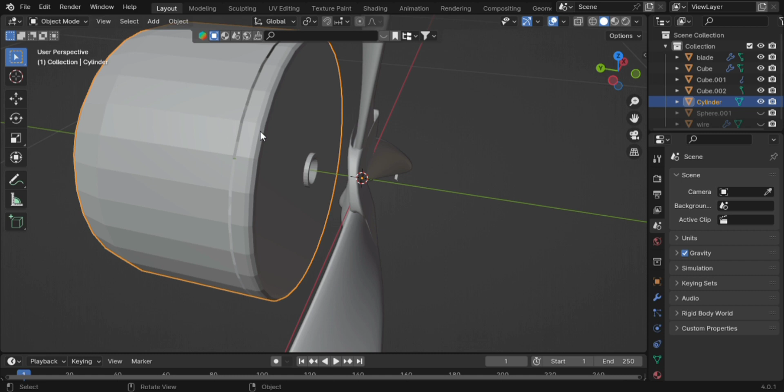Let's go ahead and shade smooth this back. If you haven't watched part one, check the channel. Let's tap into edit mode, and we're going to change a few things here. First, we're going to loop select the outer edges on the y-axis, front and back.

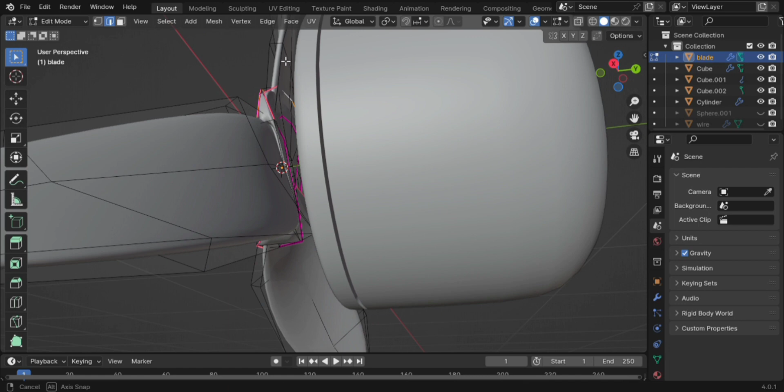Then we're going to scale in that circle so it makes sense. Just loop select this and this - I'm holding down Shift Alt, by the way, selecting this, and then go to the back and do the same thing. Loop select this, and loop select that, just going around.

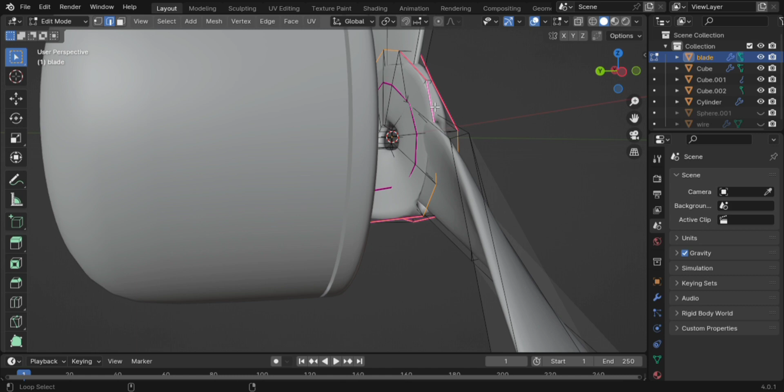Please bear with me, the mouse is acting up. Loop select this, and loop select this, and finally loop select this. So now we have everything selected. Go to your front view, and we want to scale it in like that.

You guys kind of get the point now. We're trying to get a very organic looking fan so it doesn't look like something that's just modeled out of a cylinder. So I think that's about what I'm going to go with.

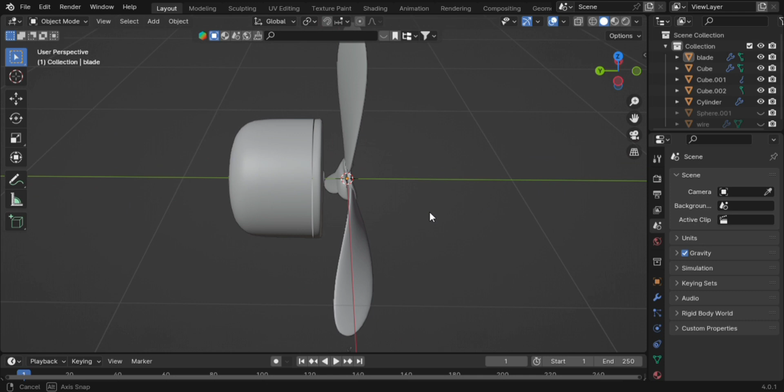Let's hide this - select this, press H, and I think there's one more. Yeah, that one - select it and press H. Hide it. Now this is what we have, right? Great, so we're going to continue modeling.

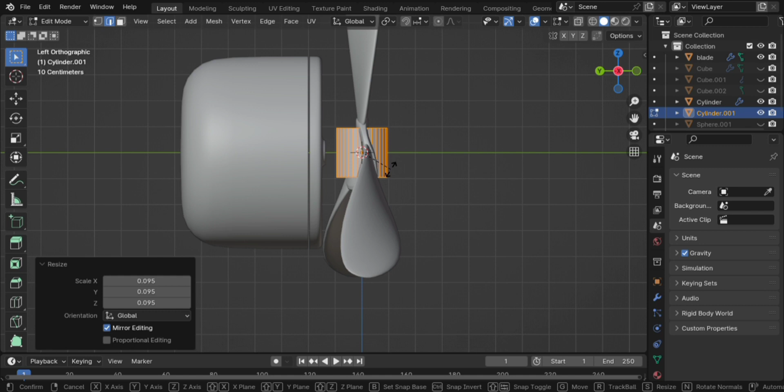We want to go Shift A mesh and get a cylinder, tap in and scale it down. We're going to use R X90 and press enter. We're going to use this to make the rod that connects the motor to the fan.

So we're going to scale it out like that, then GY, and kind of place it in there like that. Now we're going to do a few things here, right? We're going to...

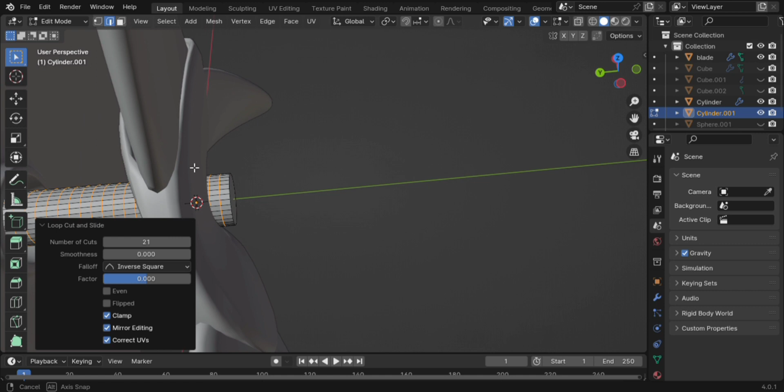We're going to add in some loop cuts, like about that many, and go to our face select option, Shift Alt select this face, E to extrude, right click to let go, Alt S, and then scale along the normals like that.

Now this face we're going to use to sort of cover that hole there. So we're going to select this edge and bevel it, Control B, just to give it a more defined shape, but we're going to do some extra tweaking.

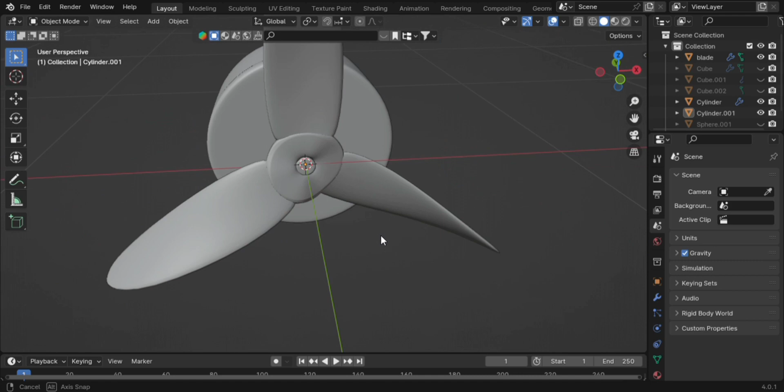Because from afar you can't really see, but I don't want to leave details unresolved. I think that's the word. I don't want to leave the details without resolving issues with it. Every single detail I have to try to...

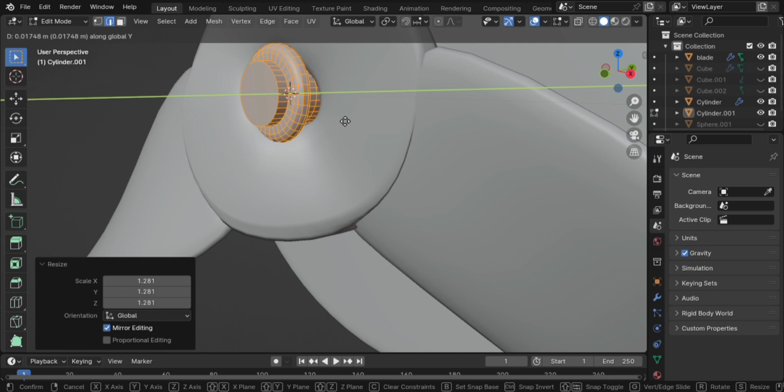Let's move it back, G Y. From the front, it's embedded in the fan blade body, but I'm sure there's a way we can go about this. We don't have a reference material for this project, that's why it's a bit difficult, but it shouldn't be that difficult.

I'll figure it out. So what we want to do is loop select this and then scale it out like that, just to make it big, right?

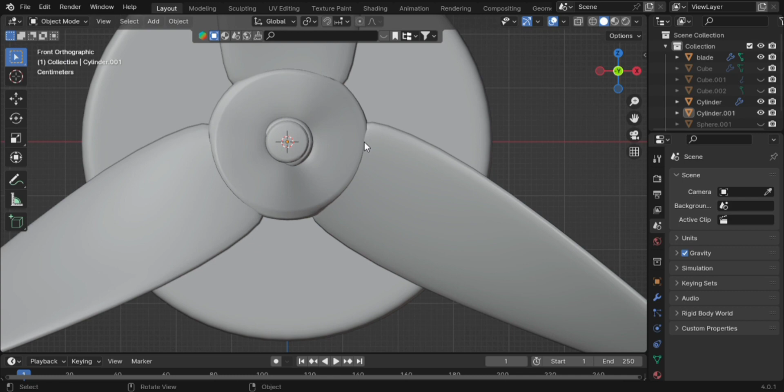I want to bevel this front, give it a more defined shape. Then look at it from the front. I think it looks a little bit better now, but we're still going to work on that. We might leave it like this, but I don't feel comfortable.

Let's just correct that. Select it, tab in, loop select this edge, these faces and this face, and E to extrude, right click to let go, and then Alt S and scale along the normals like that, just so it's a little bit thick, so it fits in there perfectly. So let's tab back out and see how it looks.

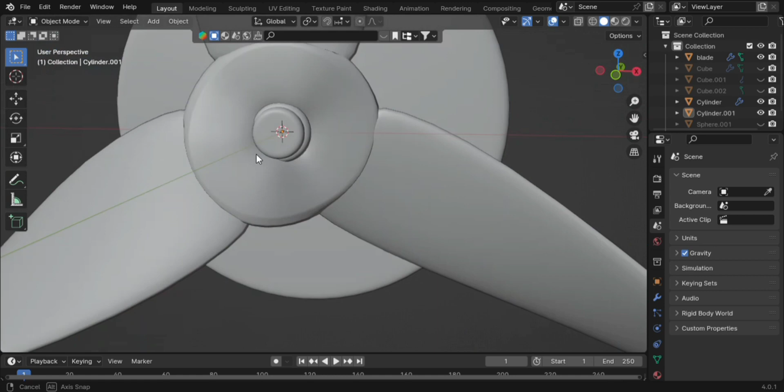We want to tab in, select this face, and I to inset, Shift R 3 times, and right click and go shade smooth, and this is what we have. I think we can work with this, since the fan blade will not be the focus of our scene.

We're going to set the origin of this to geometry because we're going to do a boolean operation on it. So let's add in a cylinder, we're going to use this, just scale it down. We're going to use the cylinder to make the little detail at the back.

You know that button at the back of the fan where you press so it can rotate or stop rotating, that small detail - so that's what we're trying to do with this. Let's scale it really small, and then just place it up there like that, right?

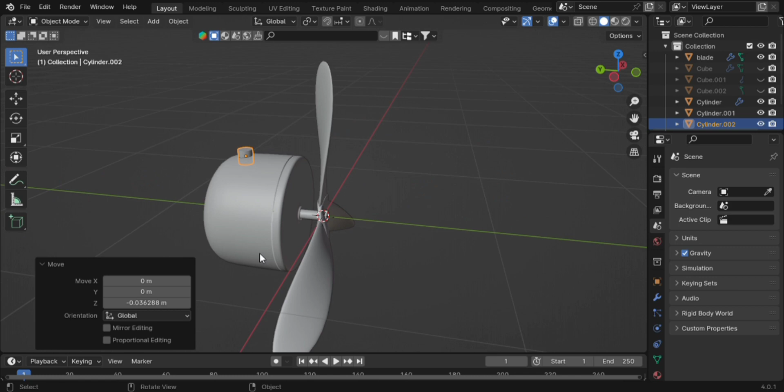So let us select this back, go to modifiers, go ahead and give it a boolean, and click on the eyedropper and select the new cylinder.

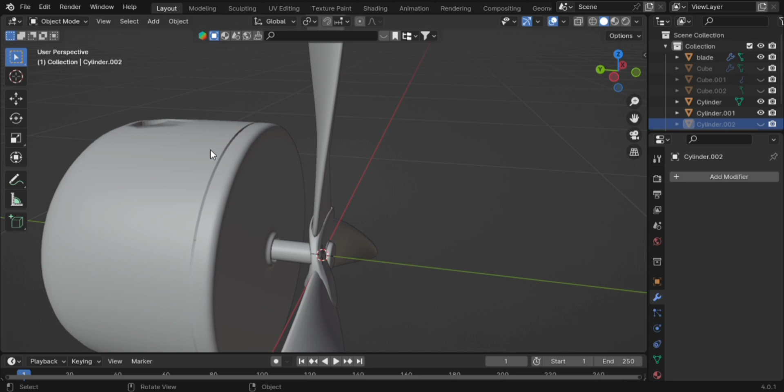You want to go ahead and apply all of these modifiers, add subdivision surface, and then this boolean, and then press this and press H to hide it. You see weird shading, right click and go shade auto smooth to fix that issue, and then Alt H, bring back everything, and we're going to continue modeling.

So let's scale this in like that, so we kind of have that cavity where that thing is seated, so it looks like it's coming out of that. You guys get the whole point. So you want to loop select this, go F3, checker deselect.

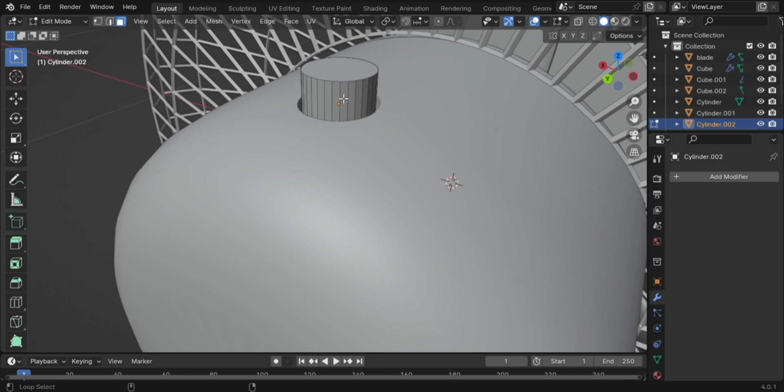It will go ahead and select every other one. You want to go to your top view, go Alt E, and extrude individual faces, just extrude them out like that to give it a more defined shape and make it look good.

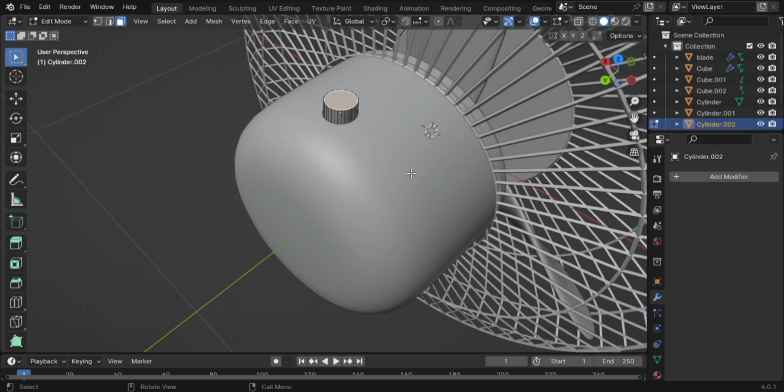You might want to select this top part and extrude it up a little bit. Then loop select this, right click to let go, and go Alt S and scale along the normals like that.

Let's see, I'm trying to think, is this how they did it? Okay yeah, this is exactly how it looks like, I think.

So we're gonna give this a subdivision surface modifier. Okay, we're gonna give this a subdiv modifier.

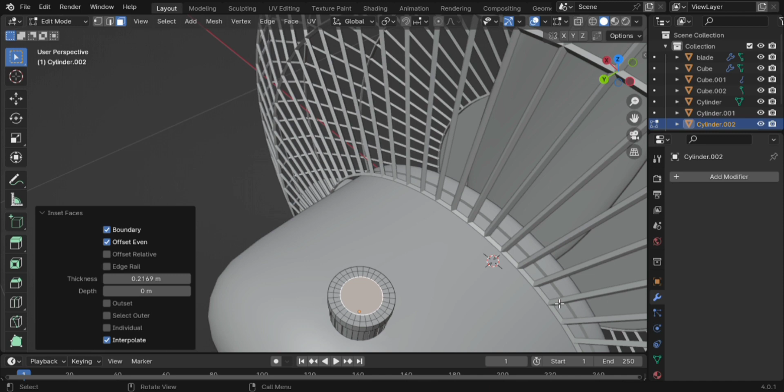I'm trying to look at this. Let's inset this face - I want to be sure I have decent topology so it doesn't mess up my work. Shift R to repeat that action, and that is great. So now if we give this a subdivision surface modifier, it's still not going to work.

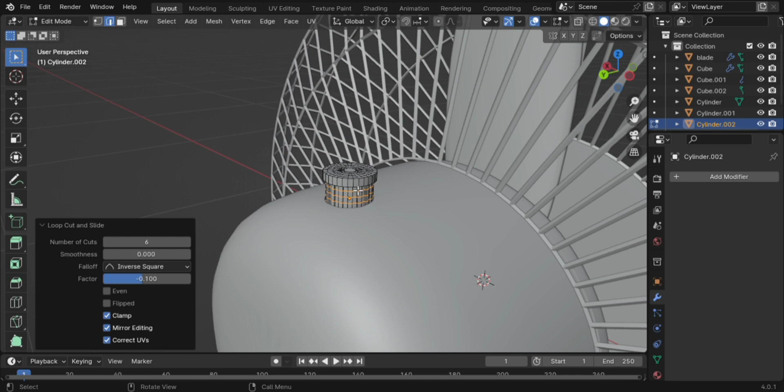We're going to have to add in some loop cuts here. Hovering over this place, Control R to add those loop cuts, and maybe add one or two up here as well.

So when we give it a subdivision surface modifier, it doesn't spoil the topology that we have. You want to tab out and go Control 1. That gives it one level of subdivision surface modifier. Go shade smooth, and this is what you have.

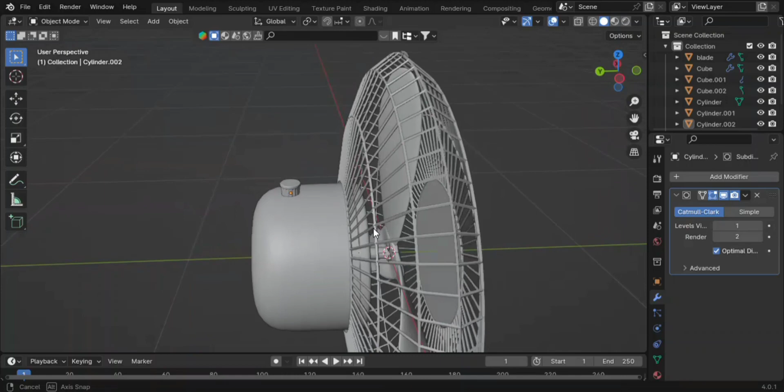So this is where we've gotten so far. We want to go ahead and model the other parts of the fan. As you can see, we're making progress. We are almost done with the modeling.

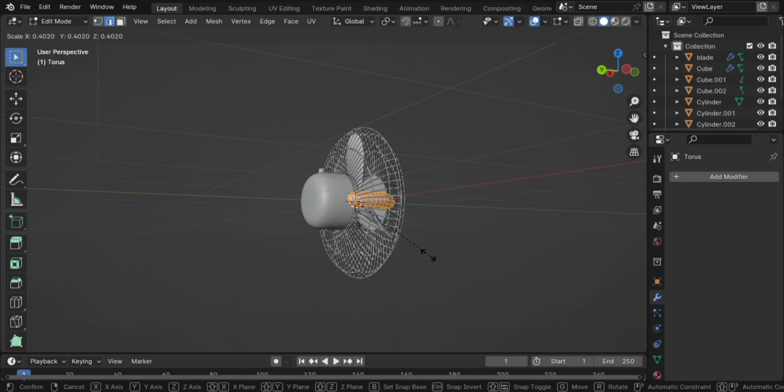Let's go Shift A, mesh and torus, tab in, and then scale this torus to be really, really small. Then bring it back, G, scale it really small, and move it down like that.

Now we want to place this torus where we're going to be extruding. Go Alt S to make it really thin like that, and place it where we're going to be extruding out the rod from the standing rod.

So with this torus active now, I'm trying to figure out if I need to do a boolean operation again so that the rod can come out of a cavity, but that's not really necessary.

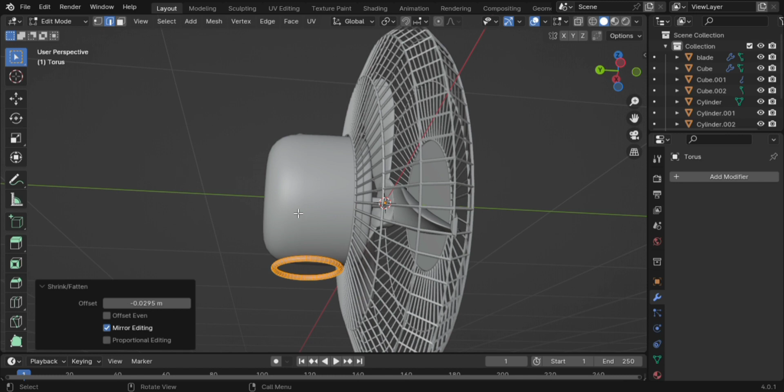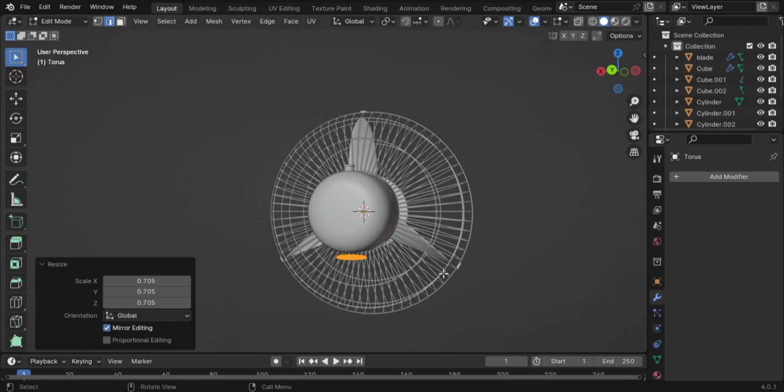So with the torus active, now we're gonna put this torus - I'm trying to see where we can put this. Look at this, okay, let's just get it down like that. I want to go like about that much, that's okay.

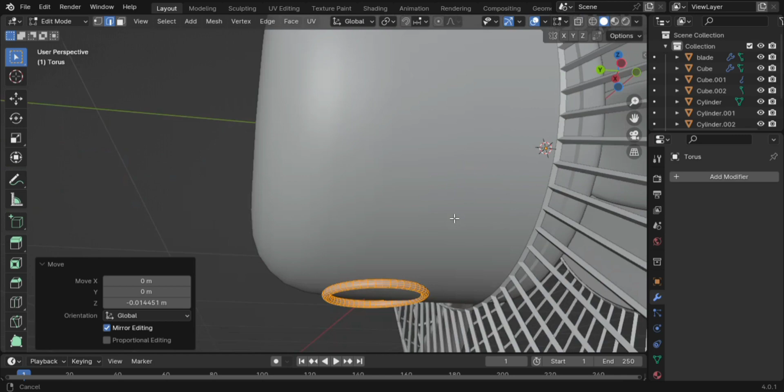G, Z, and move it up like that. We want to scale it down even and bring it down a little bit like that, and scale it down a little bit also.

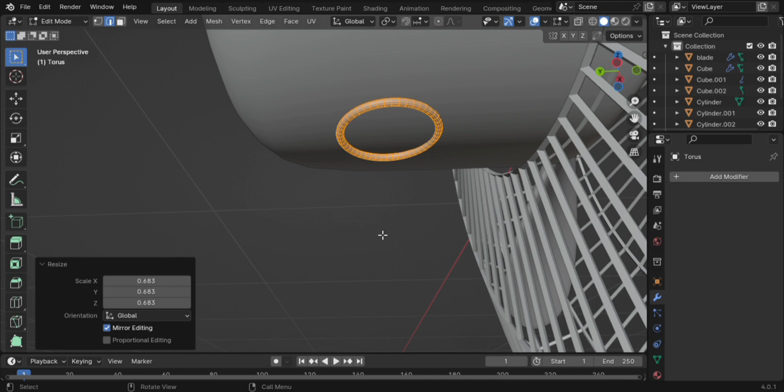Okay, so looking at it, that's fine. So from your top view, we're going to try to place it somewhere that makes sense. I want to tab back out and look at it from the side, look at it from every angle and make sure it is well placed.

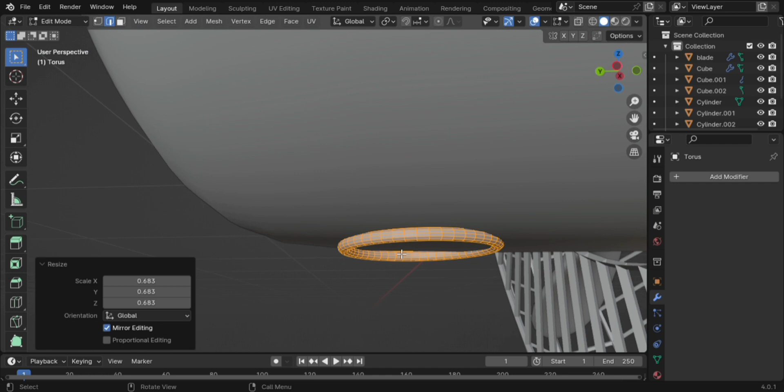That's going to save your work. It's going to help you get things right, make sure they are well placed.

Okay, we have our fan coming together quite nicely. So the next thing you want to do is tab back out and go shade smooth. Look at it - detail is everything, you need to be sure you're getting it right.

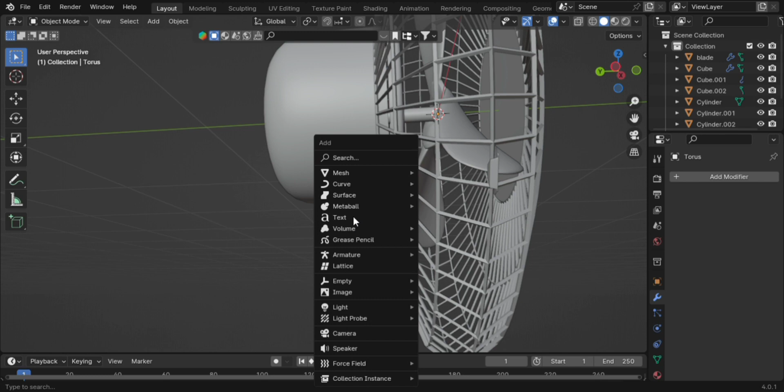Go mesh and add in a cylinder. We're going to use the cylinder to make that rod, tab in and scale it way down.

In our side view, G and place it down there, then scale it way down like that, and scale it some more.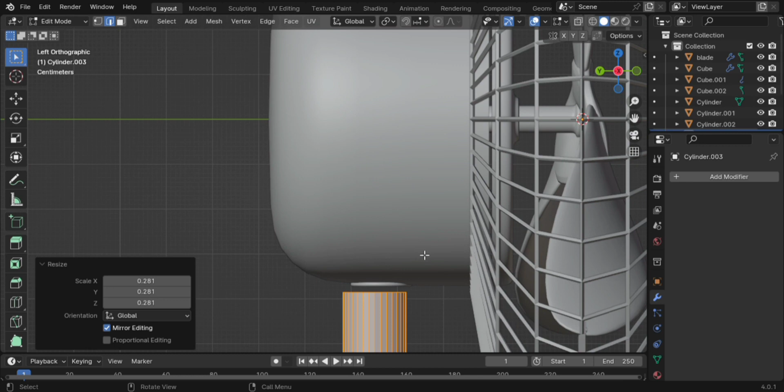Just trying to place it there, try to place it there. So you're gonna have to do a few tweaks, trying to make sure it's properly placed and all. Look at it from every angle.

You guys understand, so just select this bottom in your wireframe actually. Select everything, then go G, Z, and just bring it down like that.

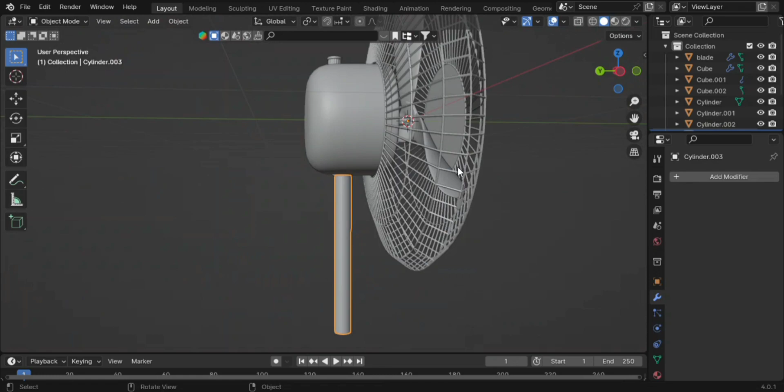Like I said, look at it from every angle, make sure it is properly placed. It has to be precisely placed where it should be for your work to be neat and to look good. It has to be properly placed at the right place.

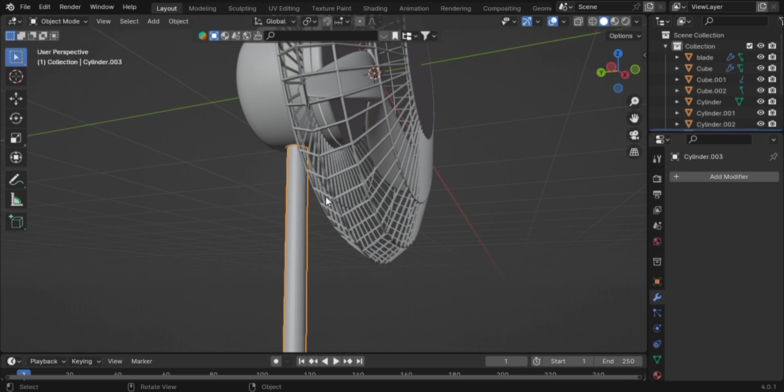You want to select this now and shade auto smooth, and want to leave it like that, right?

Now the next thing we're gonna model after that is - I'm trying to look at this. Trying to look at this. We might need to just move it back a little bit.

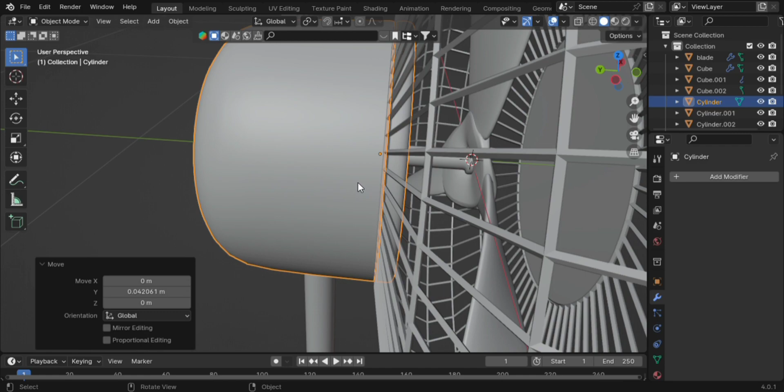GY like that. And that has affected some other details. Just check around, you see that it has affected something that is out of place. Look at that little detail at the back.

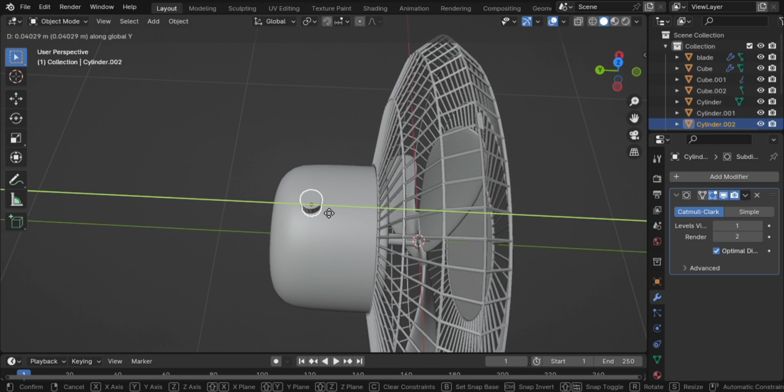If you look at it, you see it has affected the position, so you have to move it as well. GY, try to place it rightly into that cavity and make sure it is sitting very well in the cavity. So what do we want to do next?